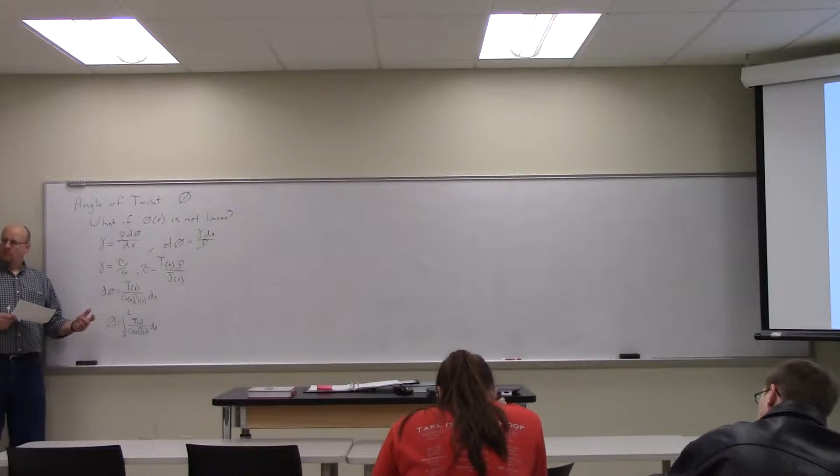Now fortunately, most of the time we're not going to have functionally distributed values; most of the time we're going to have discretely distributed values, like we did in the problem from last class. In that bottom problem, at one end it's a rod, at the other end it's a tube. One end it's a rod, one end it's a tube, so J is changing, but just changing discretely. The entire end of the rod has one value of J, the other end has a different value of J. Torque is changing too: there's an applied torque at the end, so that end experiences that torque, but then there's an additional torque applied by the wing thing in the middle of the rod. But again, it's a discrete change.

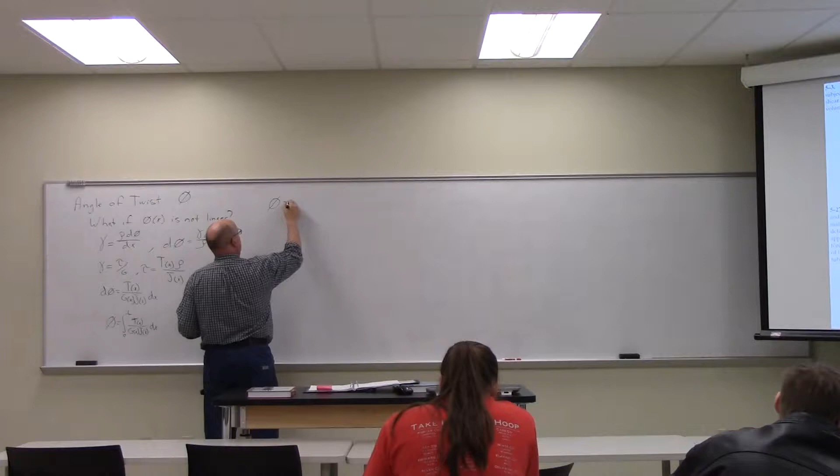So in reality, most of the time what we're going to note is that the total twist is going to be the sum over i pieces, so that in each of those regions, these values are constant, pulled out of the integral, and we just integrate dx for the length of that section. So we're doing discrete integrals along the length of the bar to yield the sum. Make sense?

Okay, and this is where we get to the sign convention for phi. It's positive when the right-hand rule for that phi points out of the bar, out of the rod, and it's negative when the right-hand rule points into the rod. So in other words, if you look at the picture over here of the twist...

On the bottom one, 527, the torque being applied on the outside is going to create a negative twist, because the right-hand rule for that torque has my thumb pointing into the rod. But then the next one actually does the same thing - they both create negative twists. So there's a negative twist in both cases.

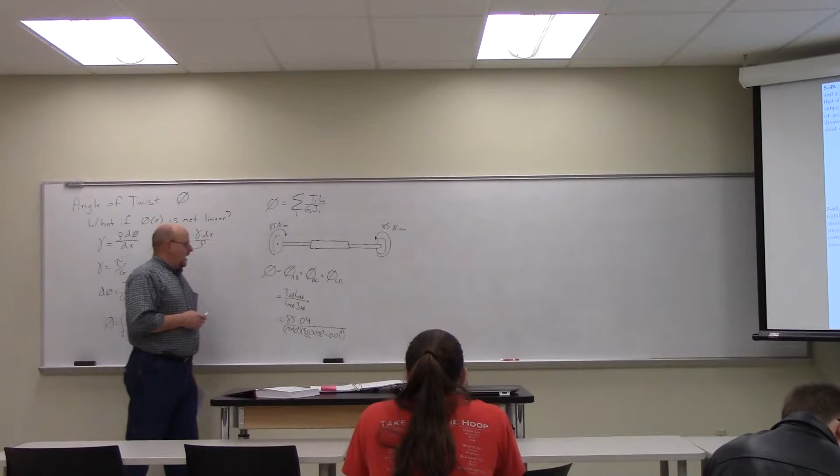What about TBC? What's TBC? Center section, it's gonna be 85. Same 85, right, because it's 85 along the whole thing. What's LBC? 0.25. Wait, I thought the first one was negative. I'm just finding them all, and then we'll put the minus sign in front at the end.

Next, it's all one continuous torque. Even though they're going different directions, they're both going into the rod - this is why you count it as into or out of the rod. The one in the back is pointing back into the rod, and the one on this end is going into the rod. They're all pointing into the rod, so they're all negative twists, even though they're going in opposite directions. This is why the convention for twist is relative to the rod, not relative to some absolute geometry. Okay, same thing with compression.

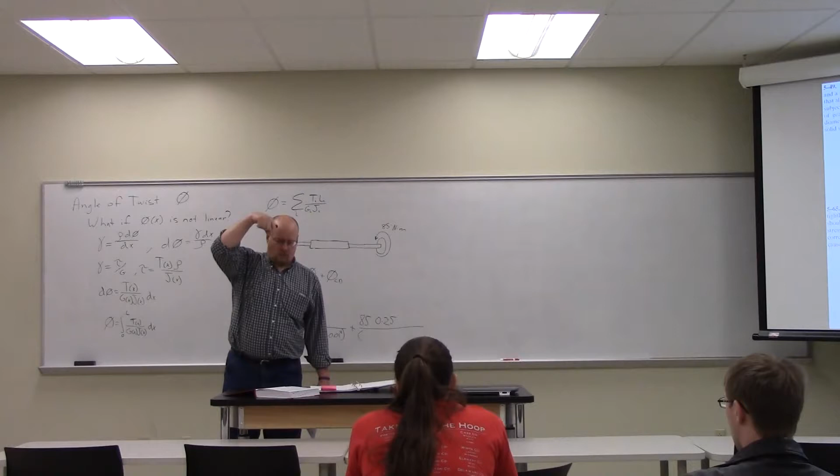We can get our minds wrapped around this in the translational sense - if I compress something, I say well, it's got a negative stress, because the stress in this direction at the bottom, or this direction at the top - it's a positive stress at the bottom, a negative stress at the top. No, it's a compressive stress, it's into the sample, so it's negative. Like I said, linearly, translationally, you can get your mind wrapped around that easier than rotation. Everybody good with that, the sign convention? Okay.

Okay, what about CD, section CD? Same as the first one, so I can just throw in a times 2, save myself a little work. And hopefully that gives me a value of 0.01534, if we trust the solutions manual.

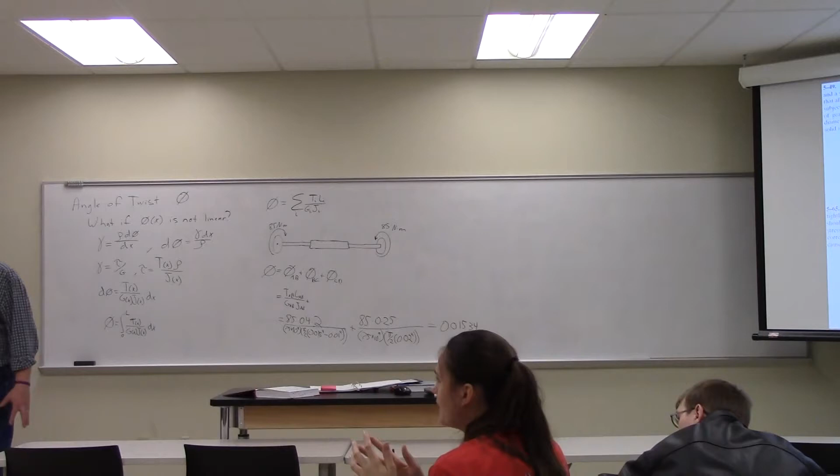Jesse's fingers are rapidly validating the performance of the solutions manual. Not rapidly, it's been long - my thumbs don't work so well at 3:30 in the afternoon. Hey, this is a soccer player who wears mitts over his hands - he's not used to using his hands, he should be typing with his toes. Well, you're the goalie, aren't you? Yeah, he uses his hands but wears gloves - do you wear the big mitt things? Those are gloves, some people can move their fingers. Do they? All right, let's focus. Aren't there some goalies who wear mittens so they can't move their fingers? No, you're dreaming - maybe that was gym class in middle school. Yeah, they're just gloves.

Did you get there? Yeah, okay, same number? Yep. Okay, what are the units?

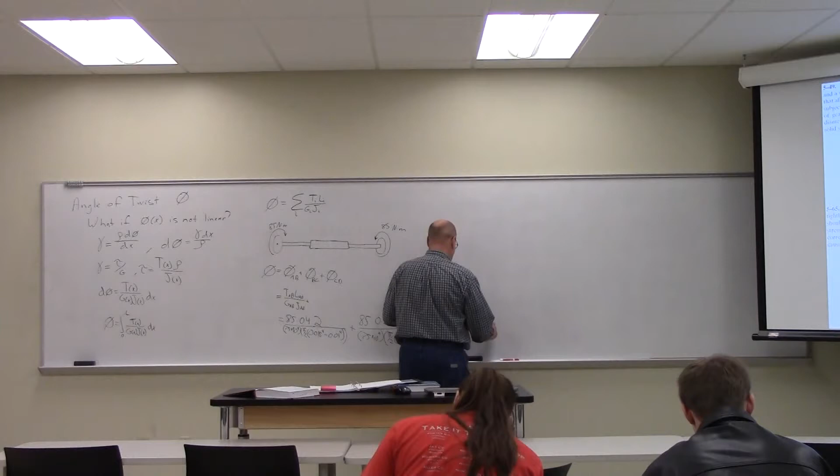Nope, radians. SI unit is radians. So in degrees, that would be 0.879 degrees. So one side lags the other by almost a degree.

So how do you know which side is going to... can you just be like, well, I'm going to call this my side that doesn't move, and this is going to be the side that will move? No, it's relative twist. Twist is one end relative to the other. That's why it asks to determine the angle of twist of gear A relative to gear D.

Right, but if you did D relative to A, it would be the same, wouldn't it? Right, because it's relative velocity, or relative displacement, it's all the same. You can't just pick which one you want to do. Displacement of A with respect to B is equal to displacement of B with respect to A. Actually, in most cases it's minus B with respect to A, but in this case, because of the way we define torque and twist, they're equal, not equal and opposite.

Okay? Snickering over there, Jason. All right.

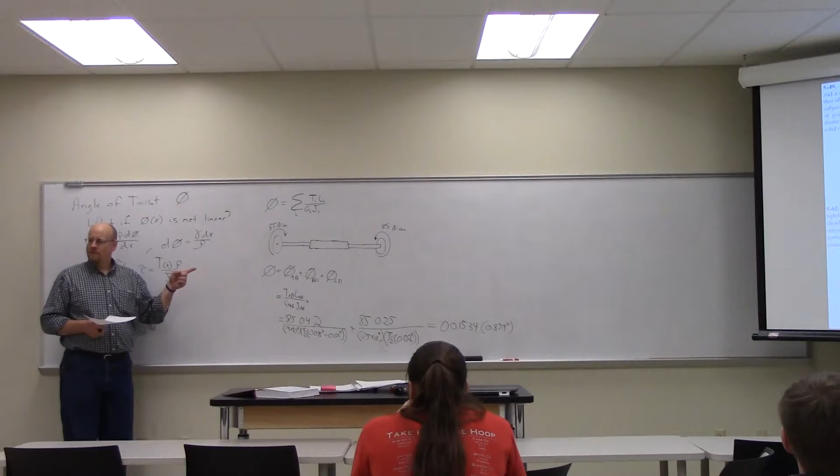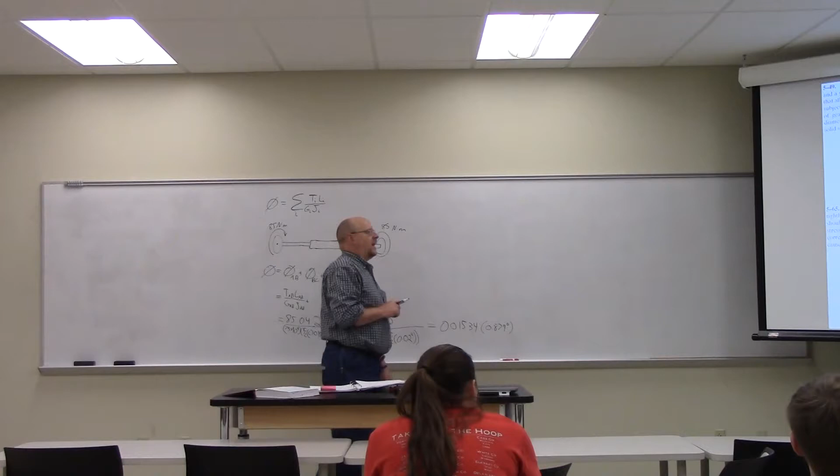Yeah, okay, let's move on to 565. The 8mm diameter A36 steel bolt is screwed tightly into a block at A. Determine the couple forces F that should be applied to the wrench so that the maximum shear stress in the bolt becomes 18 megapascals. Also compute the corresponding displacement of each force F needed to cause this stress. Assume the wrench is rigid.

Okay, so we've got this bolt, we're screwing it into block A, and essentially it's stuck. The bolt has come to a stop. And so we're trying to twist it, in this case actually out of block A. And we need to apply a torque to get it out, and it's going to require a shear stress of 18 megapascal in the bolt. Anything more than that, and we snap the bolt.

And we wouldn't snap the bolt generally, unless it's defective, at 18 megapascal, I don't think. Who knows? So, what do we do?

Free body worked for us last time. Free body of what? Free body of a handle. Let's go with A, 'cause we just want that. Free body of bolt A. All right, here's bolt A. Should only be the only one that had a letter next to it. Yeah, right, handle H, I don't know. Okay, there's our bolt. What forces or stresses or whatever are applied on this bolt? What do we have to add to the bolt?

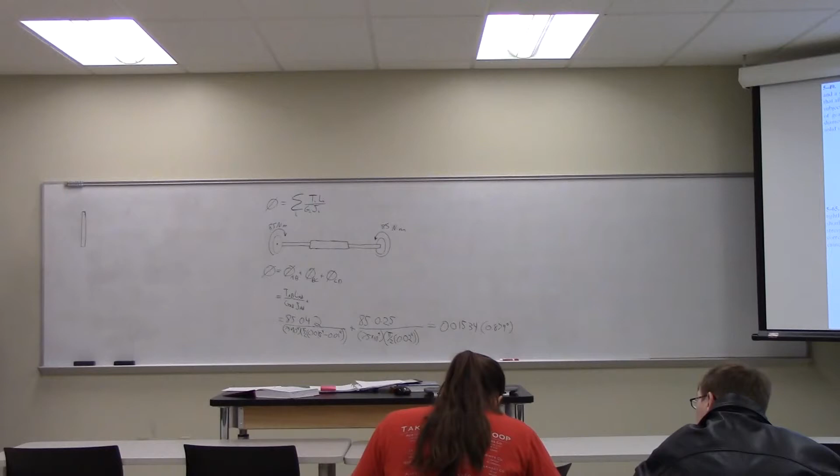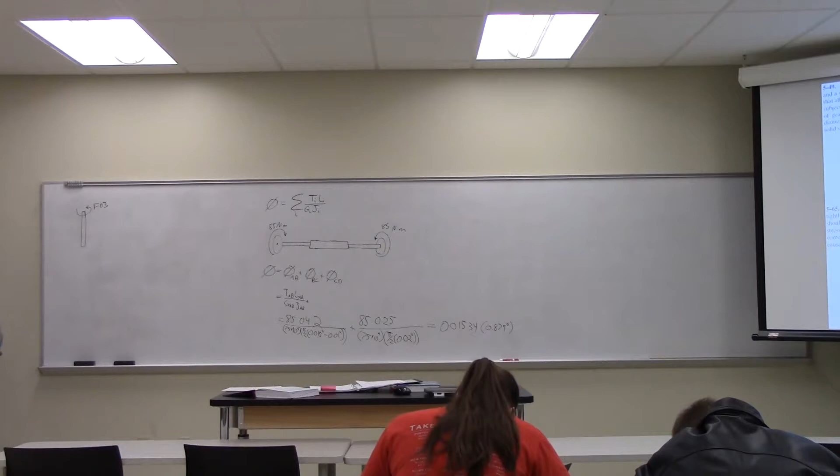A torque. Torque where? On the top. On the top? And how much is that torque? Sorry, say that again. How much is that torque? 2F times 0.15. Yeah, 2F times 0.15. Okay, or F times 0.3. 0.3 F, right, that's the couple. The couple is the forces times the distance between them. Okay, actually I'm going to make that 0.3 F. Good? So there's our free body.

What do we do next? Wait, isn't there... We would technically have a reaction torque at the bottom? Yeah, reaction. So there would be a reaction torque at the bottom, also 0.3 F, because there's no other intermediate torques applied. What now?

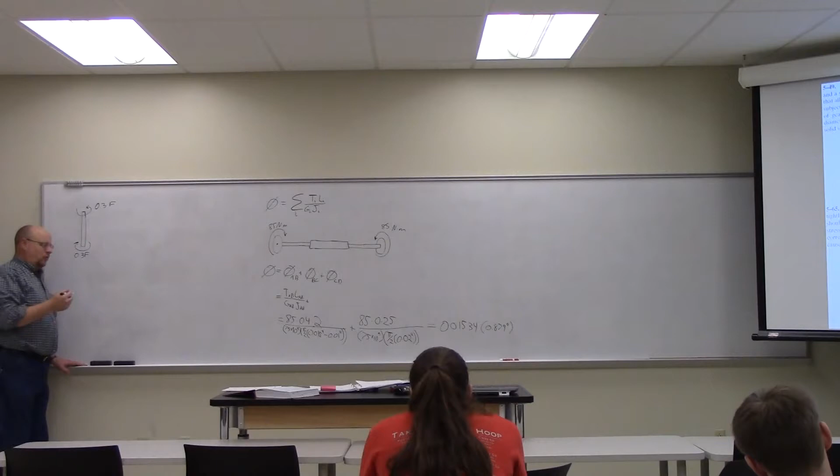Tau is just F over A, right? Well, it's not usually represented as F over A. It's usually shear stress. In this context, we need to have something a little more elaborate than F over A. Normally it would be V, because it's the shear force divided by A, if you have shear on a beam. But here, we're talking about the maximum shear stress. And since it's torsion, we don't have a uniform shear stress at a point - we have a shear stress that depends on something. So you need to give me an expression for that in the context of torsion.

G times gamma - that would be one way of expressing it, though we don't have a gamma yet. We also have torque times phi... actually, torque times C over J, because we're trying to find the maximum shear stress, which occurs at the surface. So we want the radius of the shaft. Yeah, T times rho over J.

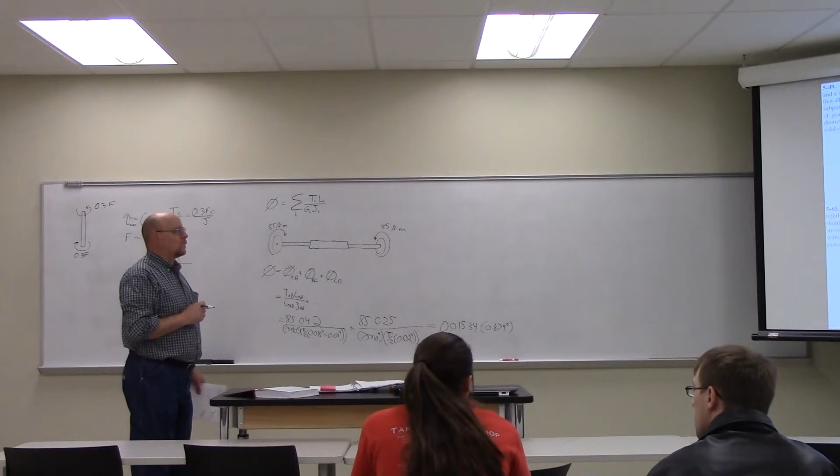What is J? J is pi over 2 times 0.004... so 4 millimeters. Wait, that's not right, that's not drawn right. That's not the radius of the shaft - they've labeled that as the length of the shaft. They labeled it 80 millimeters as the length, and then 8 millimeter diameter. Oh okay, I see - those zeros.

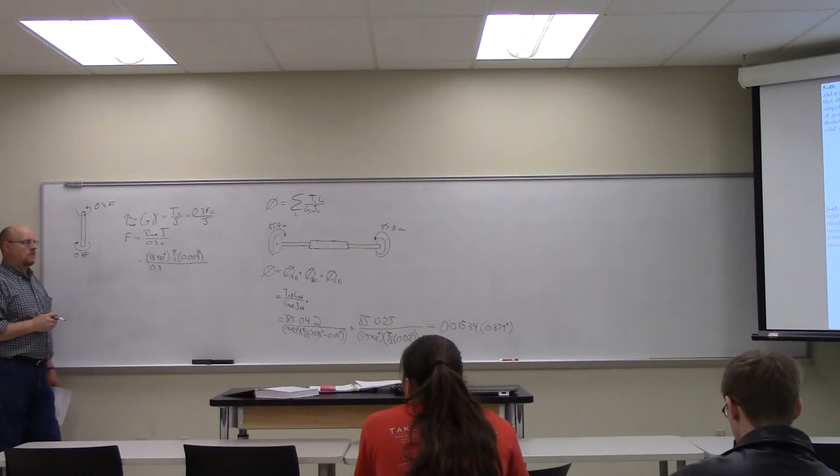Divided by 0.3 times... what's C? Oh, it's the same C, so I just make that a 3. Wait, no - I thought C was... no, C is the diameter, I'm sorry, radius of the shaft experiencing torsion.

Because it scales as T rho over J, but tau max occurs at the surface where rho is equal to C, the radius of the shaft. So this C is the same C we used to calculate J, but it was C to the fourth divided by C - we just knock out one of the C's. Rho is the variable radial position, and C is the absolute radius.

All right, after all that, we find that the force is equal to 6.03 newtons. Hopefully that works out. Okay, good, so that's our force. Is that all we need? What else are we supposed to find?

Also compute the corresponding displacement, each force F needed to cause this stress. So what are they asking for? They're asking for phi, or they're asking for the displacement, but we're going to find that by finding phi. What expression are we going to use for phi, or how are we going to get phi here? What's our approach for finding phi?

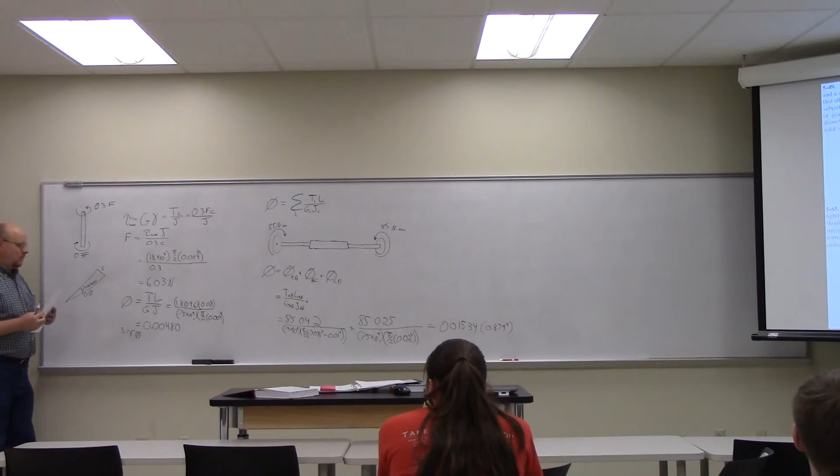S is equal to R phi, right? It's conversion from polar coordinates to V equals R omega, or V equals R omega, S equals R phi, you know, okay. So it's just that times the radius.

So are we considering the rotation being negligible, consider it straight? No, this actually is the arc. Oh, that is the arc length? Right, if you think about it, if it moves in a full circle, what would it be?

It'd be R times 2 pi, 2 pi r, the circumference of the circle. So this is the circumferential motion, it is not the translational motion. But for such a small angle, it might as well be the translational motion.

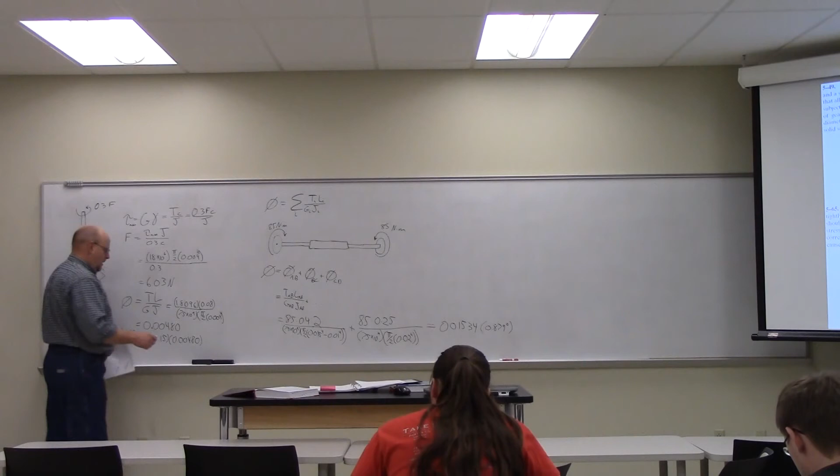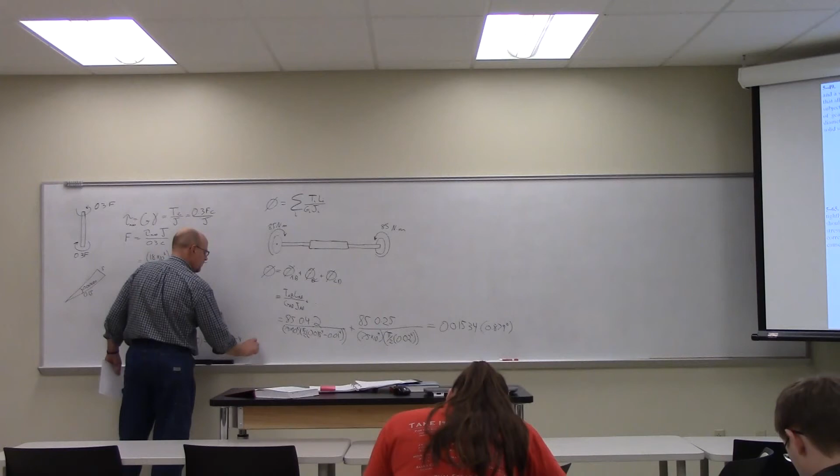And if we do that, we get 7.2 times 10 to the minus 4, which is equal to 0.72 millimeters. So in order to create 18 megapascals of torque, or of shear stress on that bolt, I only need to move it less than 3/4 of a millimeter.

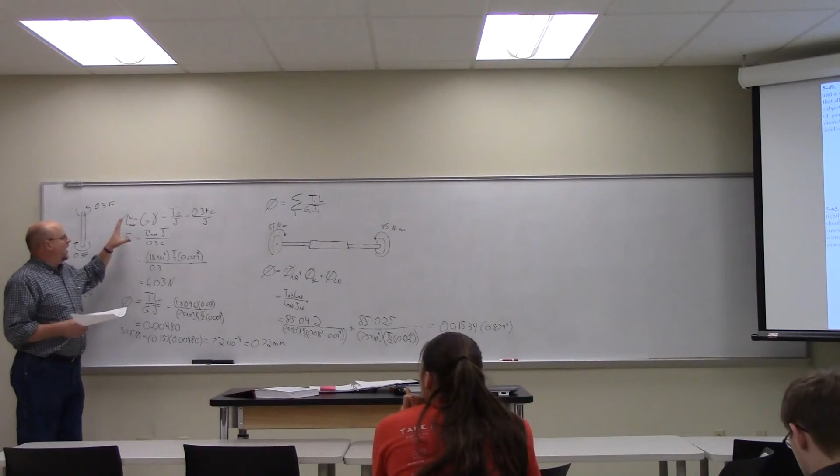Okay, so I've taken the time to go through in class in the lecture part to try to derive these things. You guys are going to end up just using these expressions on the homework, right? Phi equals TL over GJ, tau equals T rho over J. But in reality, you need to understand where that came from. You need to be able to sort of wrap your mind around it, because if you wrap your mind around it, you're more likely to remember it when you're taking fundamentals of engineering exam.

Right? You'll have a cheat sheet. In fact, I was looking today to find out what equations they give you on the FE exam. I figured I'm going to give you guys the same equations on the test as they give you for the FE exam. So I'm going to go through the FE exam for strength of materials, see what equations they give you, and I'll give you that equation sheet for the exams.

But otherwise, the exam is a big closed book. You don't want to be rifling through reference, looking up exams or equations all the time. You want to be able to conceptually get them so you can remember, oh yeah, that's F over A, and be able to get to this.

So I walked you through that process in the notes, and we'll continue to do that through the semester. I'll walk you through where this comes from. In the end, from an engineering standpoint, you just use sort of the final product. But if you really understand where that came from, if you make sure you conceptually get it along the way, it'll make it easier for you to recall and work with those problems once you get them. Okay? Make sense? All right.

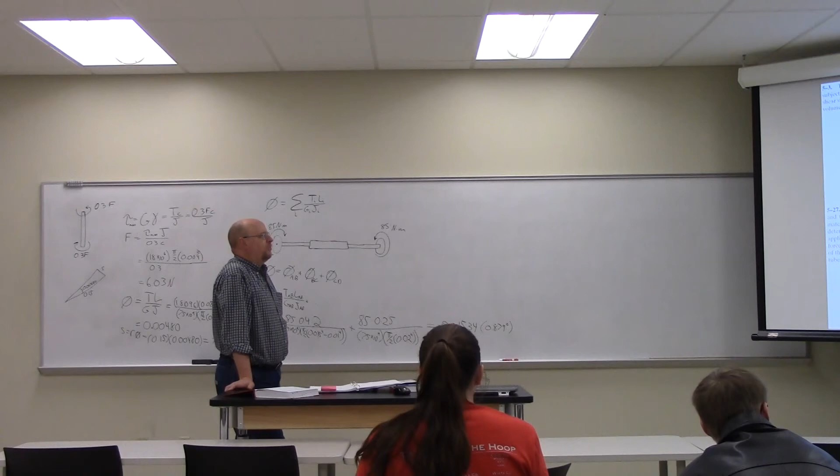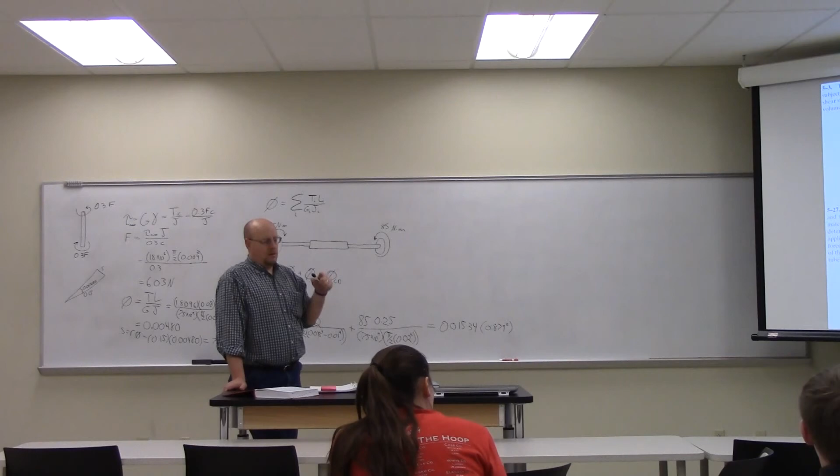Everybody understand that? So torque T is going to cause a shear stress of 12 ksi. By virtue of how the problem is phrased, you can presume that shear stress occurs in member AB. The maximum is going to occur in AB, and BC might not have achieved its full shear stress, so you might be able to apply an additional shear on section BC. Does that make sense?

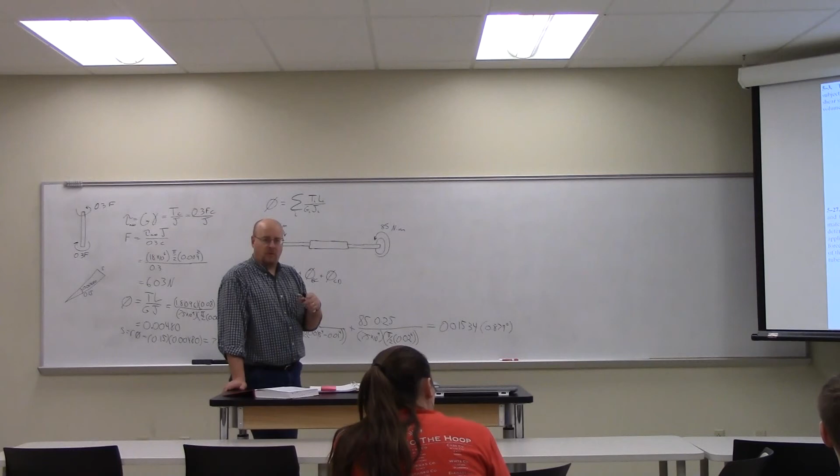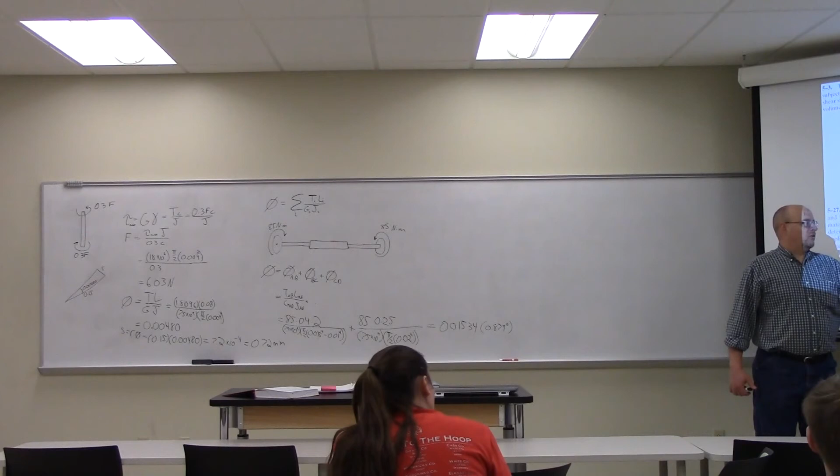Kaylee, you see what I'm saying? We're going to find the stress out here that's going to cause this to reach 12 ksi, but this one shouldn't be at 12 ksi, so we should be able to tolerate some additional torque on these wings to put that one to 12 ksi. Okay?

So the inner portion, the tube part, would it get stressed out before the outer part? Which gets stressed out first, outer or inner? Outer. Got to vote for outer. Blake's the one asking, so I'm assuming he's not going to vote. What do you guys think?

On that tube, which is going to see more shear stress, the outer or the inner? The torque is actually applied sort of at the end. You don't think of the torque as necessarily something grabbing and twisting - it could be something like this twisting, could be a frictional torque. You don't know that, but it is the outer.

All right, look at our expression for shear stress: tau equals T rho over J. Right, so comparing the solid to the other one, we've got to take into account the J's to figure out which one's going to experience the larger stress. Whichever one has the smallest J is going to have the largest tau. Right, the smallest inertia gives you the largest tau.

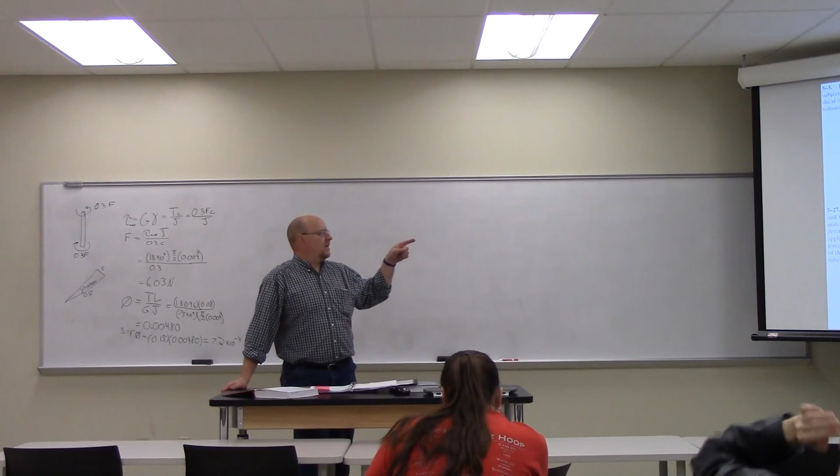Okay, so AB has a rod of 2 inches, and BC is 4 and 2. So J for AB is going to equal pi over 2 times - did they give me diameters or radii? - times 1 inch to the 4th power. So it's pi over 2.

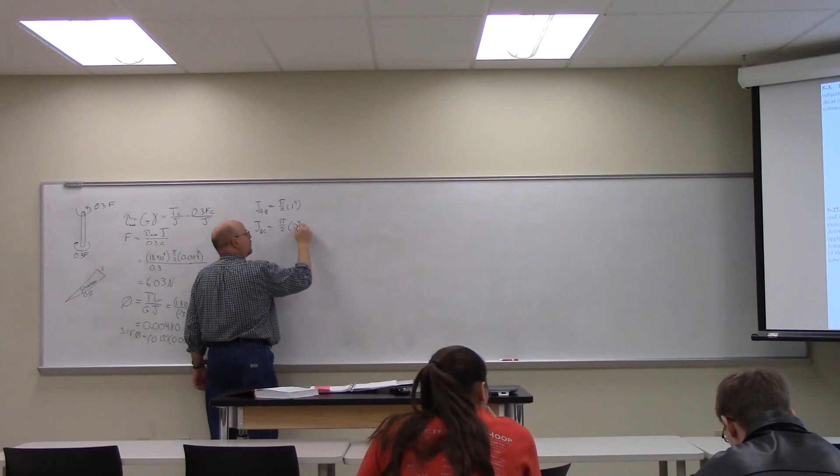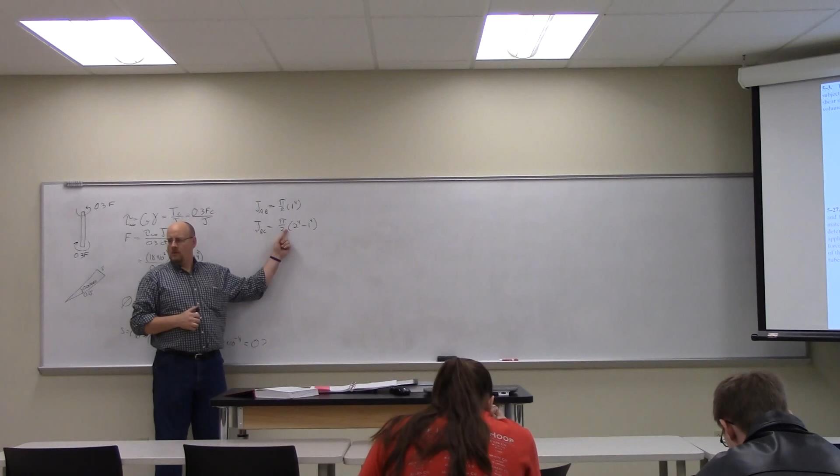J for BC is going to be pi over 2 times the outer, 2 to the 4th power, minus the inner to the 4th power. So I end up with 15 times pi over 2. You see how this is the J's? So the J for BC, the tube, is 15 times as big as the J for the solid rod.

See it? Yeah, so if the J is bigger, then the tau is smaller. But isn't the torque different? Not initially - oh, because we're saying initially P's are 0. Right, we're saying initially the P's are 0. Oh okay, gotcha. Right, so we're finding the allowable torque T that can be applied to the end of the rod.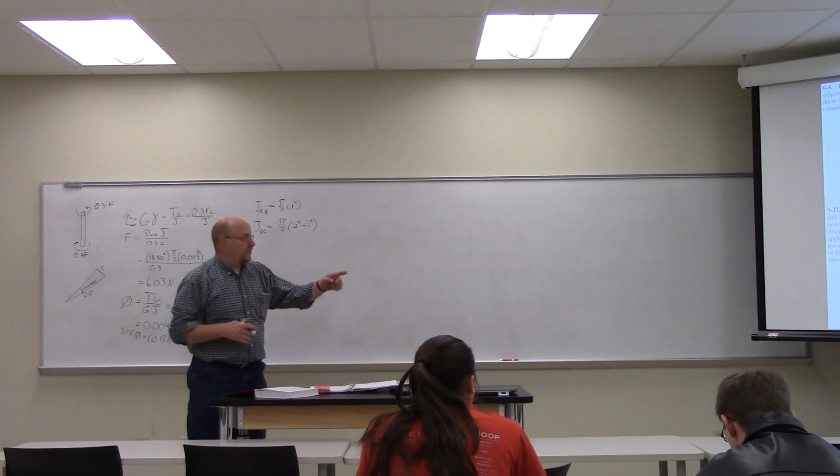That's why I thought BC would break first, I guess, what I was - yeah, have a higher... If BC were made... yeah, but BC has a much larger inertia, so it takes a lot more torque to get it to that. So we didn't get that far working through the problem, but at least we covered some concept there. All right?

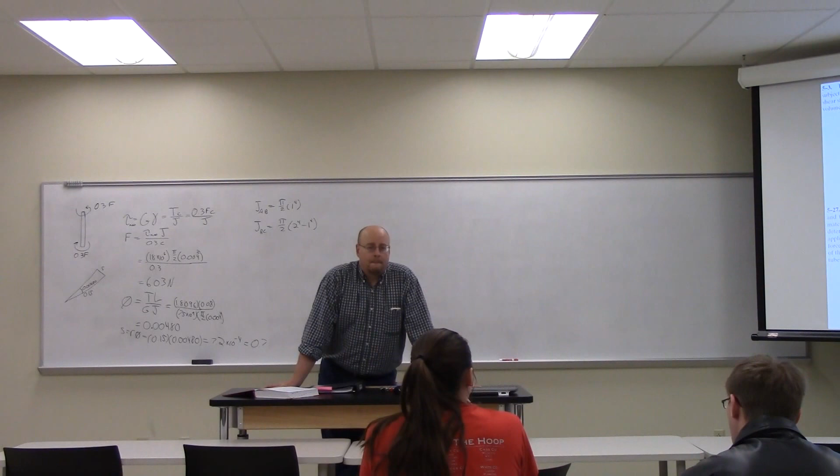So wait, go ahead, I'm trying to think how to say it. So, J's in the denominator. The torsion will be larger when J is smaller. The shear stress will be larger when J is small. Yeah, sorry, shear stress is larger, J is smaller.

So how would we do this problem if they were the same material? Because you wouldn't know which one. Well, if they were the same material, then you couldn't tolerate any P - if it was a solid rod going through there. Gotcha, because... right, whatever T was to cause failure, it would be causing failure along the entire length of the rod. Okay, so... okay.